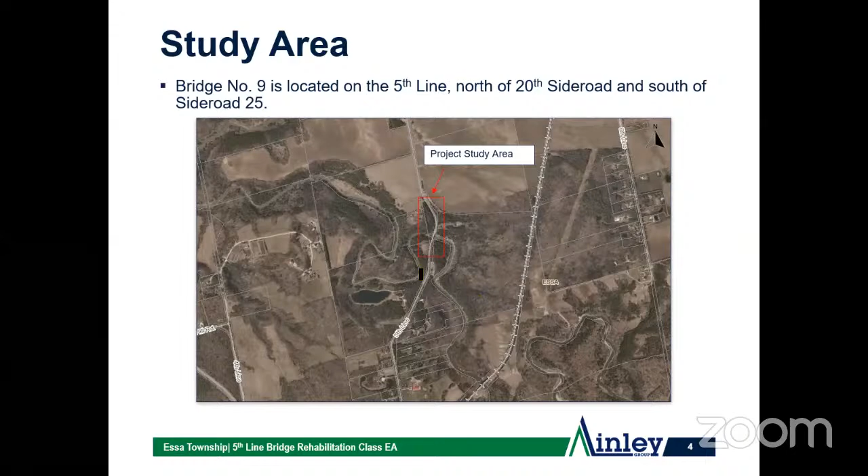To begin, just a brief overview of the study area. This is a satellite image of the project study area and the surrounding lands. The study area is highlighted by the red box right here in the middle. It's referred to as Bridge Number 9 with the Township of Essa. Bridge 9 is located on Fifth Line, south of Angus, but north of Baxter, and it crosses over the Nottawasaga River, so there's a big bend right there.

The township has initiated a Class Environmental Assessment to evaluate options that would address deficiencies associated with Bridge 9. The Fifth Line is a key transportation link between the communities of Angus, Baxter, and Alliston. Bridge 9 is estimated to have been constructed in 1950, making it around 70 years old. The bridge currently operates as a single-lane structure with sightlines on the southbound approach below standard requirements for the posted speed limit.

In 2019, an inspection of Bridge 9 was completed following the Ontario Structure Inspection Manual, and again in September of this year, 2021. The investigations identified the need for immediate maintenance items and long-term recommendation to replace the structure. Another concern is the ongoing erosion and sediment deposition, which is creating a restriction in the Nottawasaga River at the bridge location, resulting in ice and debris jams that can cause flooding.

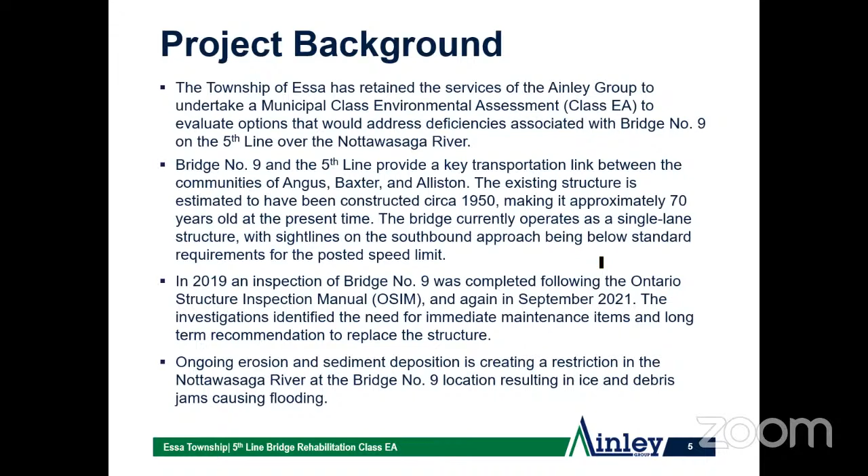A municipality is required to conduct a Municipal Class Environmental Assessment, or Class EA, as I'll be referring to it throughout the presentation, before this type of infrastructure project can proceed to construction. A Class EA follows an approved planning process designed to protect the environment and to ensure compliance with the Environmental Assessment Act. The purpose of the Environmental Assessment Act is to provide for the betterment of the people of the whole or any part of Ontario by providing for the protection, conservation, and wise management in Ontario of the environment. The term environment is broadly defined and includes the natural environment, such as plants, animals, water, etc., and the social, economic, and cultural conditions that influence the life of people or a community.

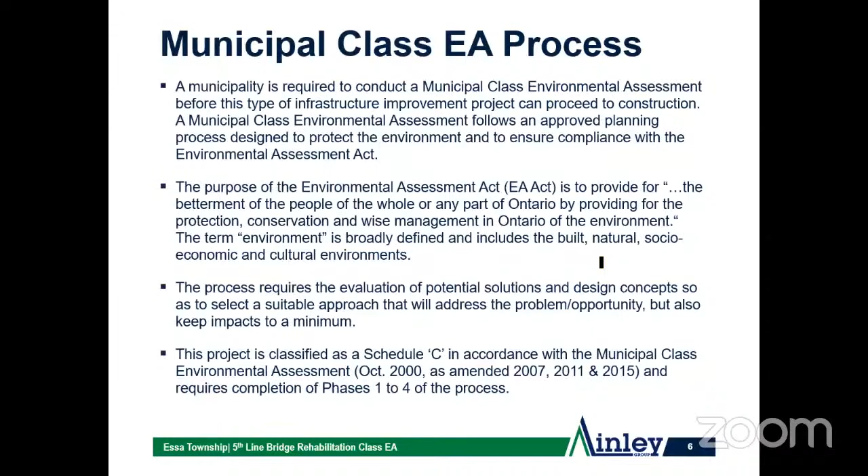The Class EA process requires the evaluation of potential solutions and design concepts so that projects, when implemented, will address the problems but also keep environmental impacts to a minimum. This project is classified as a Schedule C project in accordance with the municipal Class EA, the highest level, requiring the completion of phases 1 to 4 of the Class EA process.

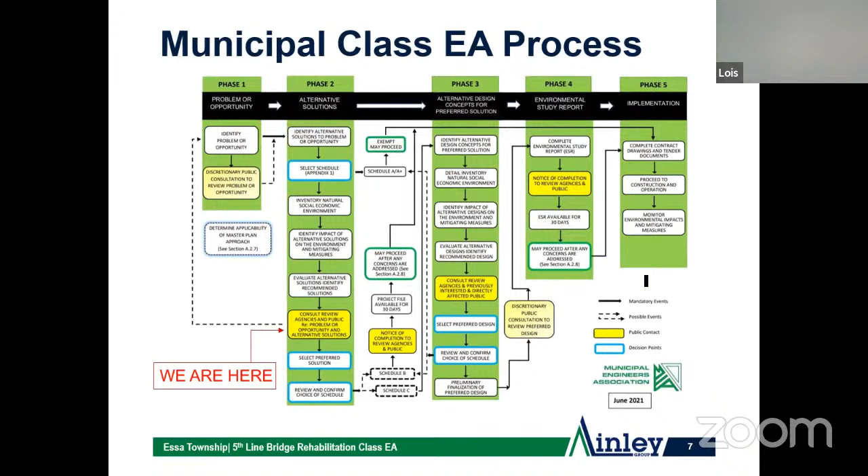Here's a visual of the municipal Class EA process to help with the explanation. As mentioned, the project is following a Schedule C Class EA, requiring completion of phases 1 to 4. The phases are listed at the top here, and we are currently almost at the end of phase 2.

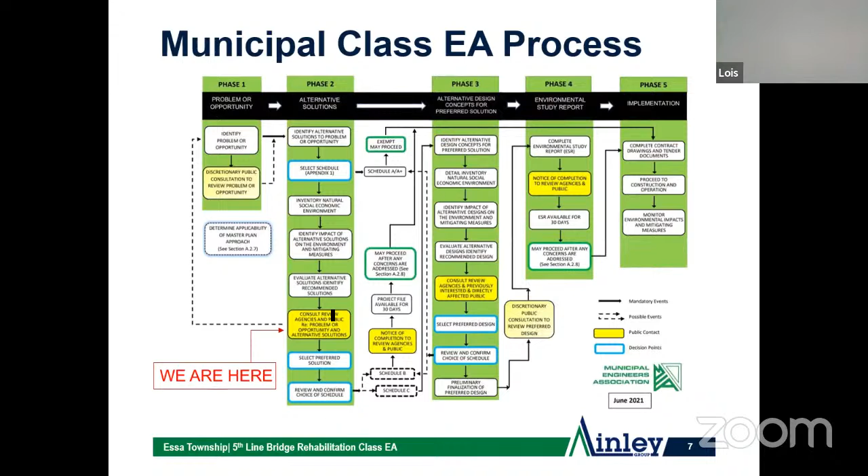We're inviting comments to be completed on each of the alternative solutions. Consultation is an important part of the Class EA process, and there will be opportunity to provide comments for consideration to the project team throughout each phase of the EA. I'll get into more detail on the next steps later at the end of the presentation.

The next few slides will provide information on the existing conditions. We assess the existing conditions of the environment to ensure that we can accurately identify any potential impacts that the alternative solutions may have on the environment. With the term environment being broad, we have created 4 categories.

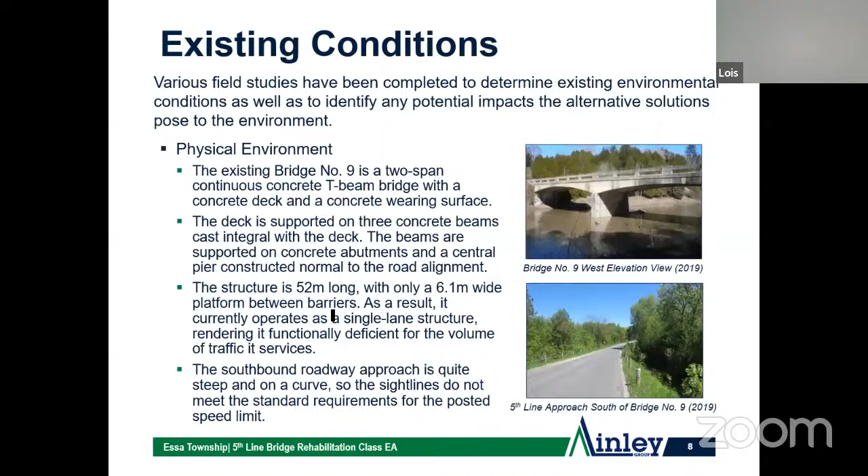The structure is 52 meters long with only a 6-meter wide platform between the barriers, and therefore currently operates as a single-lane structure. It is acknowledged that with the bridge operating as a single-lane structure, it does not function efficiently for the volume of traffic using the bridge. The southbound roadway is steep and on a curve, so the sightlines don't meet the standard requirements for the posted speed limit. The speed limit was lowered for this section of the road in an attempt to improve this issue.

The second category is the natural environment. A background study conducted by Riverstone Environmental was completed to assess the natural heritage features within the study area, concluding that the study area provides high potential and confirmed habitat for a variety of wildlife, including endangered and threatened species, while the Nottawasaga River represents direct habitat for fish species.

The topography of the study area is generally steep, with one or more small drainage features that drain runoff and groundwater seepage down these slopes toward the main channel of the Nottawasaga River. A portion of the study area is designated as an Area of Natural and Scientific Interest, or ANSI, by the Ministry of Natural Resources. The ANSI designation recognizes the unique attributes of the Nottawasaga River, including forested slopes, natural linkage functions, unique wildlife habitat, and prominent groundwater emergence zones.

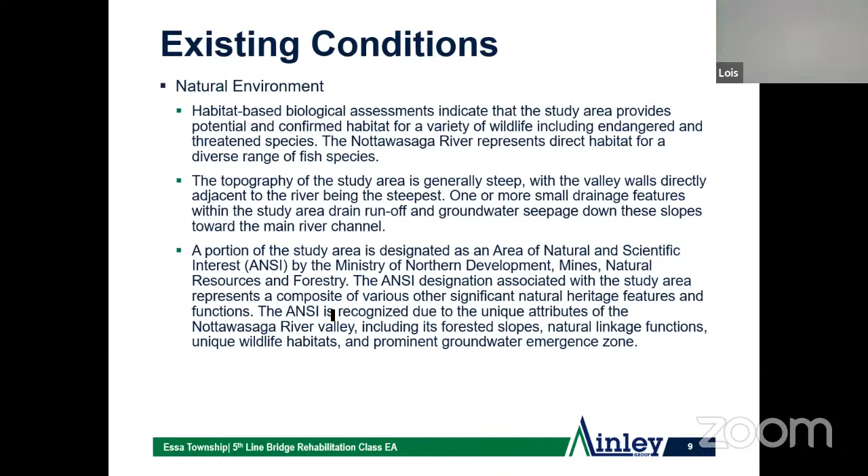Continuing on with the natural environment, the central pier of the bridge has been observed to slow the velocity of the water on the downstream side of the bridge, creating an area of deposition, which over time has created a sizable formation within the river. A fluvial geomorphic assessment was completed by Water's Edge, and the assessment determined that, based on the amount of woody debris, the river is actively eroding the river banks at several locations within and around the study area. Log jams are a common occurrence at the bridge location due to the central pier, and the log jams increase the potential for upstream flooding.

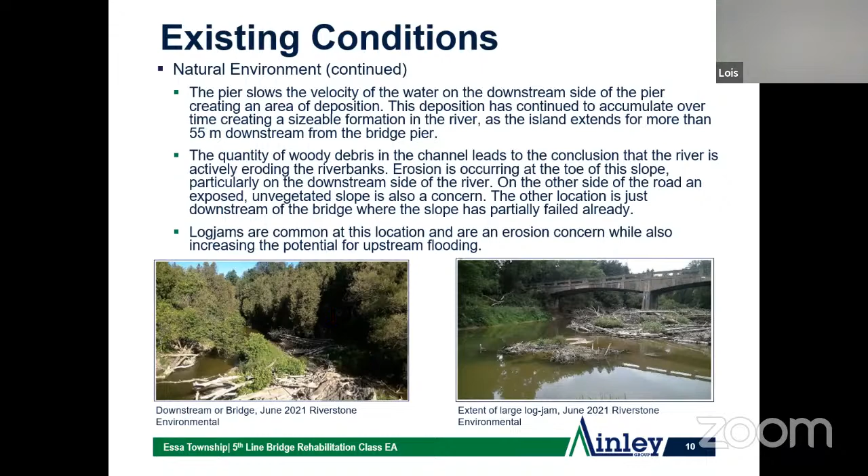The cultural environment includes archaeological resources as well as cultural resources. The presence of the Nottawasaga River within the study area indicates that there is archaeological potential. However, the construction of the area's infrastructure has altered or disturbed much of the area. Bridge 9 has a unique feature of a concrete open railing system; however, a cultural assessment was completed and it was deemed not to have any cultural heritage value.

The social and economic environments include consideration for potential impacts to uses by local communities, recreational value, and the costs associated with maintenance, operating, or construction. The township's official plan categorizes most of the land within the study area as environmentally significant areas, with a small section at the north end categorized as agriculture.

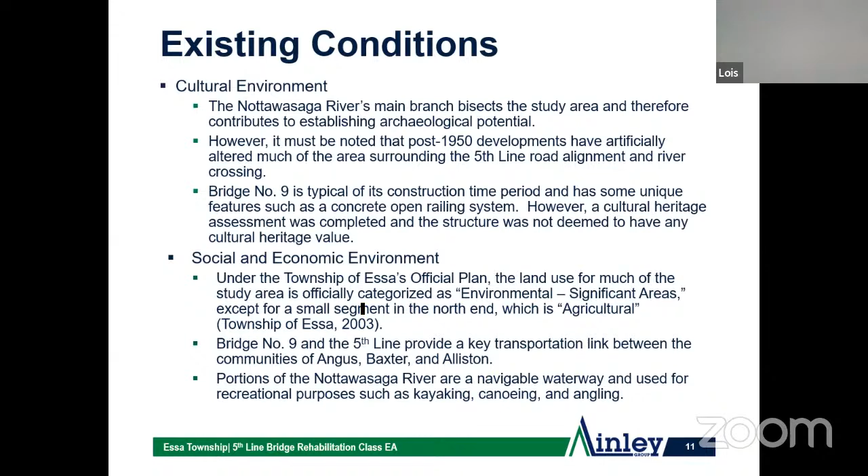The fifth line and bridge number 9 provide a key transportation link between the communities of Angus, Baxter, and Alliston. This transportation route is frequently used to access the Canadian Forces Base Borden and the Honda of Canada manufacturing plant. The Nottawasaga River portion is designated a navigable waterway and used for many recreational purposes.

As part of phase 2 of the Class EA process, several alternative solutions have been developed to address the problems identified with Bridge 9. Four alternative solutions have been developed for consideration and evaluation.

The first is a do-nothing option. This is included in the list because considering no improvements or modifications provides a benchmark to gauge the potential impacts of the other options being considered.

Option 2 is the rehabilitation of the existing bridge, which would remain in its current location. Through rehabilitation, additional deck width could be achieved, but is limited due to the substructure design. Therefore, it would not be possible to obtain 2 lanes that would meet the current minimum design standard under this option. The rehabilitation would involve replacing the existing barrier system and approach guide rail to meet the roadside design manual. In addition, slope flattening and tree clearing within the road right-of-way approaching the bridge in each direction would be done to the extent possible to improve sightlines.

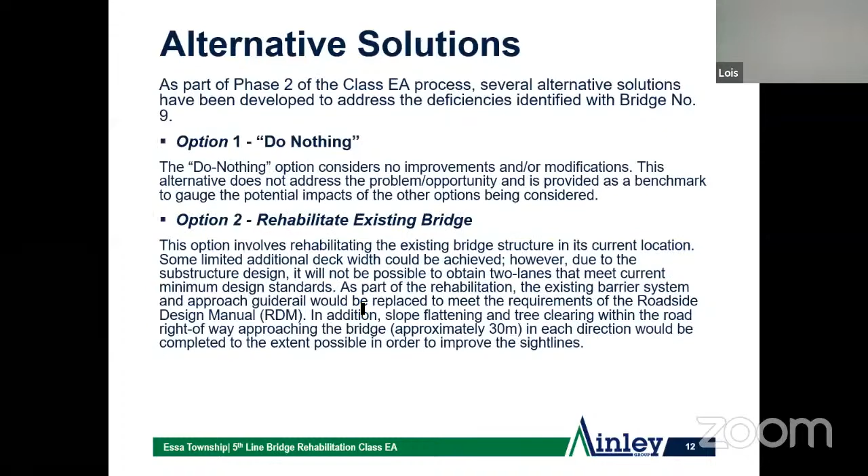Option 3 proposes to replace the existing bridge structure in its existing location. The design of the new bridge would be of sufficient width to support 2 lanes of traffic and would meet all requirements.

The bridge replacement would provide an opportunity to adjust the road profile and bridge elevation to improve the overall vertical alignment. The central pier would be eliminated and the new bridge would be a 3-span with the pier set outside the bank full width. In this illustration, at the bottom, the bank full width refers to the width of the river.

So the piers would be constructed on the bank side, not within the water at all. This is just an illustration to help describe the option, roughly just on the outside there.

As part of this option, erosion protection measures along the banks would also be reviewed, along with the removal of sediment deposition from the river to restore channel flow. In addition, slope flattening and vegetation removal would be considered to improve sightlines.

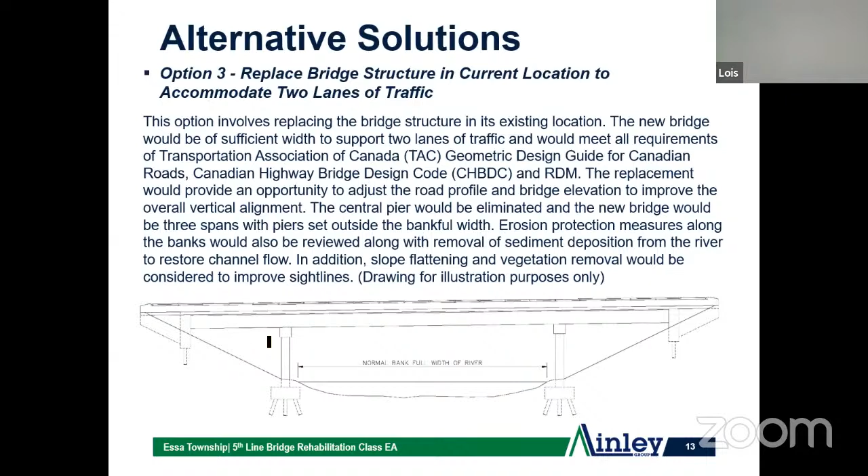Our last option, number 4, would replace the bridge on a new road alignment to the west. The existing bridge structure would be demolished and a new bridge constructed that would be of sufficient width to support 2 lanes of traffic and would meet all requirements.

As part of this option, the road alignment on the 5th line approaching the bridge from both directions would be adjusted to straighten the curves of the road. The work under this option would be contained to the existing road right of way.

On this satellite image, the thin gray lines mark the road right of way, owned by the township. Here is the current road and bridge, and this purple line indicates the proposed road alignment for this option. You can see the curves get straightened out on both north and southbound, and the bridge is shifted, pivoted to the west.

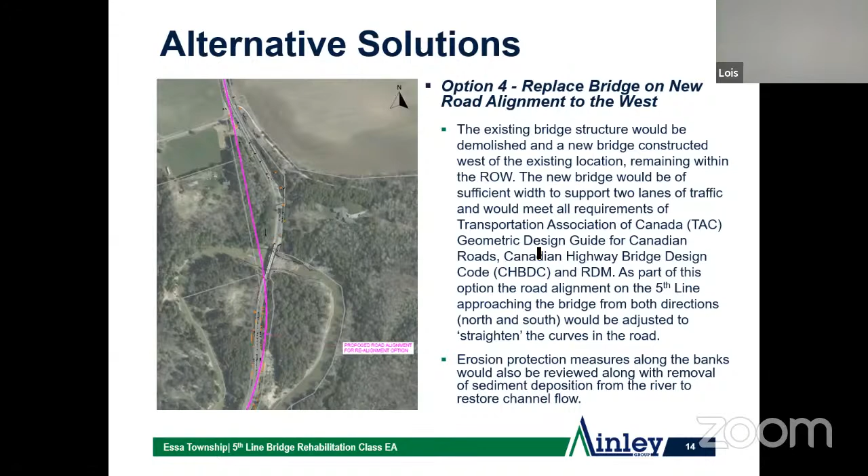We'll pause here for a moment if there are any questions or comments on what's been presented so far.

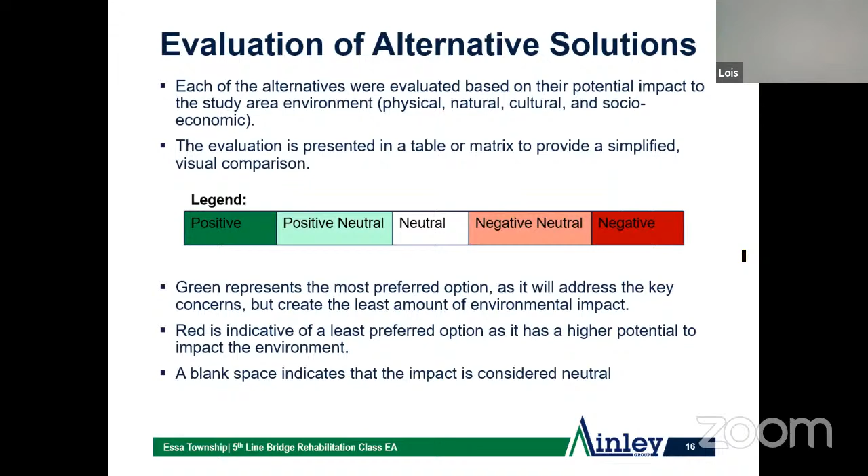Starting right at the top, with the first category of physical environment, there are 3 evaluation criteria as part of this category.

Evaluating each option with the ability to address the structural deficiencies. So I'm reading this row here. Option 1 would do nothing to address them. Options 2, 3, and 4 could address all structural deficiencies. This is referring to the deficiencies of the bridge as a structure from an engineering perspective.

The next criteria is referring to the deficiencies of the bridge as functional. The existing structure is functionally deficient, and option 1 would do nothing to address this. Option 2 would provide minimal improvements, and options 3 and 4 would provide opportunity to address these functional deficiencies. In other words, options 3 and 4 would create a 2-lane bridge, whereas option 2 would not, and option 1 would not, because we wouldn't be doing anything.

The third criteria: there are existing aerial, hydro, and telecommunications along the corridor. There's also an existing sanitary force main on the bridge structure. Option 1 would have no impact to these utilities, and options 2 and 3 would only impact the sanitary force main during bridge construction works. Option 4 may require relocation of the hydro telecommunications and would impact the sanitary force main. So they've been coded accordingly.

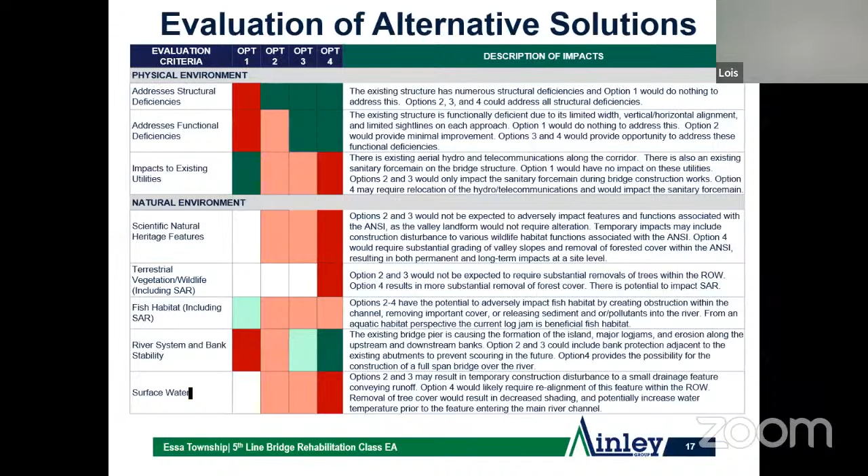And the last criteria for the natural environment is groundwater. Multiple small seeps were identified within the northeastern portion of the study area. Option 2 and 3 would not be expected to alter any factors influencing the presence of seeps. Option 4 proposes the road alignment toward the west, away from the identified seepage zone. So that's why all 4 there are considered neutral, because there are no impacts expected to the groundwater.

Social environment. Under noise, options 2, 3, and 4 would have temporary noise disturbances due to construction activity. And there are 6 residential dwellings which are considered sensitive receptors within and around the study area.

And the archaeological parts of the study area have low or no longer retain archaeological potential due to steeply sloping terrain, permanently wet conditions, or previous disturbance. However, under option 4, as it involves the road alignment, it would require further investigation because the road alignment gets into the agricultural designated portion of the land.

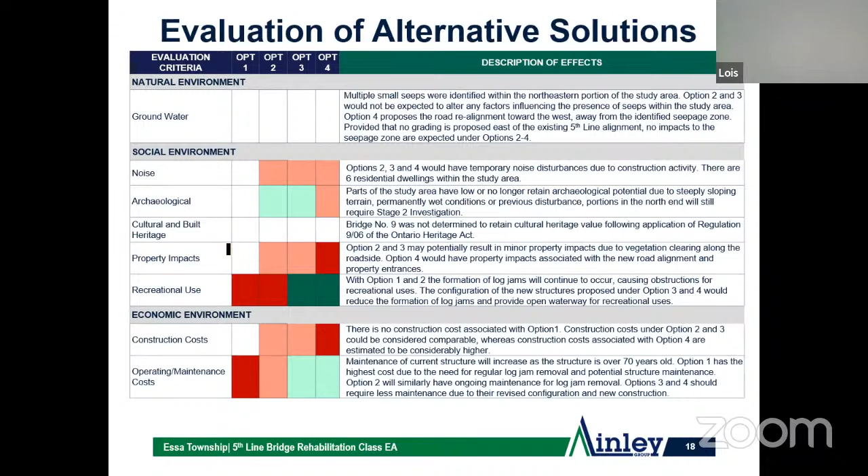So after the evaluation that we've done, the matrix and summaries identify a preliminary preferred solution as option 3. Option 3 is to replace the bridge structure in the current location to accommodate 2 lanes of traffic.

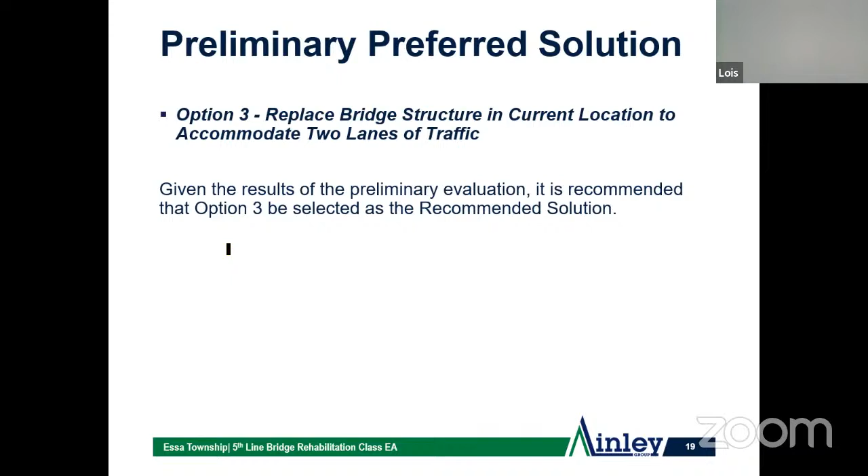...and things like that, we will select a preferred solution and the project will move into phase 3 of the Class EA process. During phase 3, alternative design concepts for the preferred solution will be identified and evaluated. So whatever option is chosen, then we move on to coming up with different designs to construct that option. Those design options will be shared in a second public information center scheduled at a future date. But advance notification of the second PIC will be provided if anyone is interested in participating in that as well.